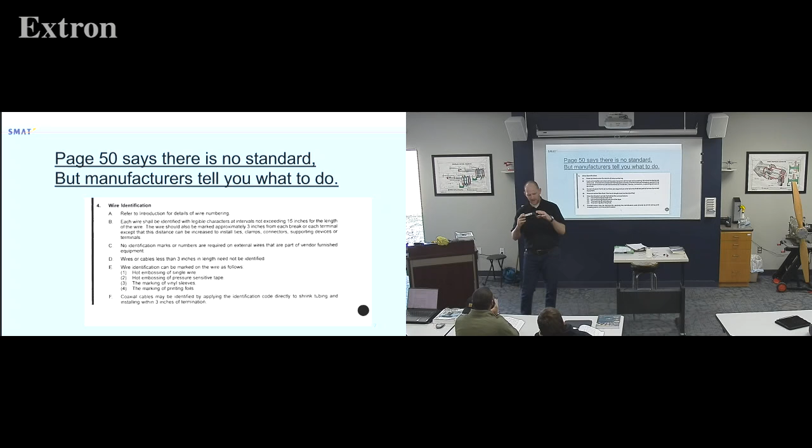One of them, if you pull a little bit out and look at it, it's actually heat shrink tube, very similar to this heat shrink tube. It's already nice and flat, which makes it easier to use your pen on, because this stuff's a bit of a hassle. I think if you look inside there, that's like 15 foot maybe. So you trim a little 3 inches off for small use. I don't have a printer that's going to work, but you take your pen, write on there, cut it off, put it on your wire, heat shrink the wire, and I do believe this one is from that. So we don't have to use the printer.

Now, if you right away touch the ink with your fingers, it's going to rub off. These ones I did with our regular heat shrink tube, and I did them with a magic marker. The magic marker ones are still on here.

You know, there's an old Chinese proverb that says, even the palest ink is better than the best memory.

The one I did with ink turned out better. So your wires in here, it takes a little bit of work. I didn't want to make you label every wire for your project because it would have been a nightmare and a ton of heat shrink too. When you start working on an aircraft, when you get out into the field, especially if it's a Cessna S model, if you want to follow the law, you will be labeling them.

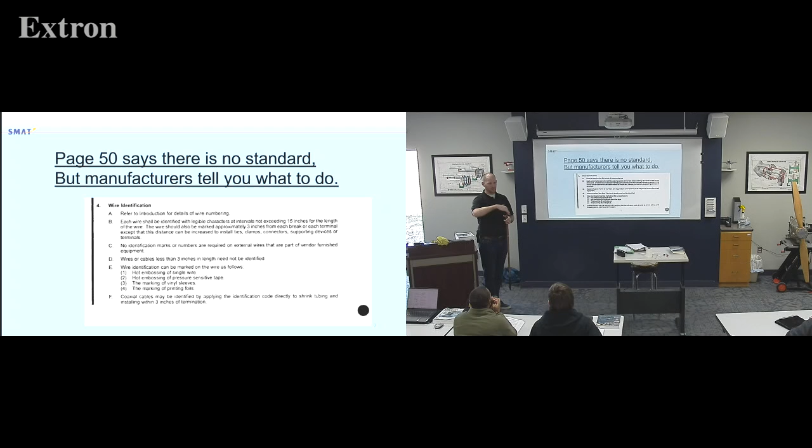A good airline shop will have a printer where the wire goes in it and it just prints right on the wire, pretty cool. We're not a good airline shop. So heat shrink's the best way to label your wire. I'm going to go with that. Questions on that? Good.

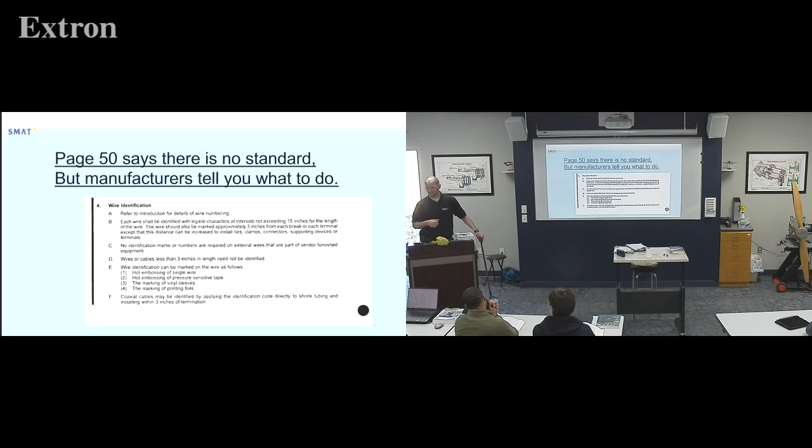Back to what we were saying. If you're working on an aircraft, if you're adding the STC, it probably is going to say in the STC what wire size, or it'll come with it. If you're not doing an STC, you're going to go find the wire that's in there. So this one goes from A plus to alternator. Well, that's going to be a big wire, isn't it?

So that is DPB12. Should I sound smart? That's Delta Papa Bravo 1, 2. Doesn't that make me sound smart? You're going to want that label not in the middle of the wire, but within 3 inches of this side, within 3 inches of the other side, and then every 15 inches-ish, depending on what airplane you're in. That's the number you put on the wire.

Make sense? Okay, let's say - what size is that wire? PB12, there's a GA here for gauge. I can't read it. There's a 5 there. 005.

5... let's pick a different wire. Let's go with this one. PB - that's a ground wire. Let me give it a small wire. PB26.

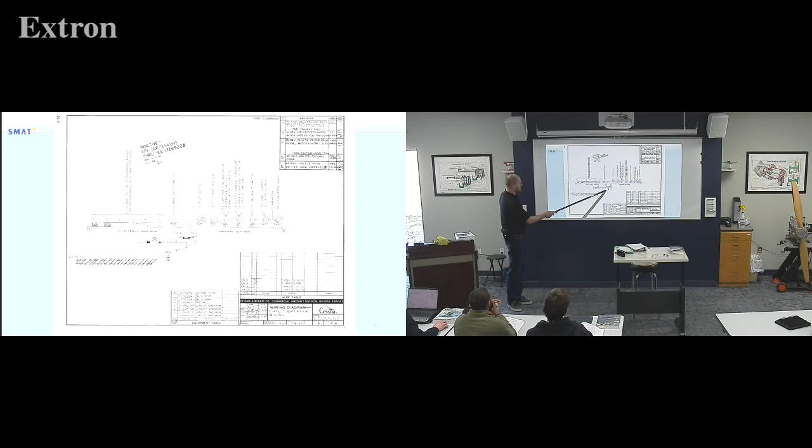Maybe it'll be on the next one. I think that was what I was trying to get across on this image, but it's not getting there. So I got a 14 gauge, 14 gauge, 18 gauge, 18 gauge, in the PA15, PA16, PA13. So it is listing these ones. But some of the wiring diagrams will say, unless otherwise stated, all wires are a certain gauge. So if you can't find the gauge for the wire you're on, look for a note like that.

All right, what do we got here? We got a landing light, MLC1. I don't know if I have that as an option. That's interesting. Oh, I got a 1. Does that give me 1 right here? Oh, that's just telling me the switch.

Huh, the right one, like 4 or 5 of it each. Oh, there you go, 14 gauge. Good eye. So 14's here, GA down here for gauge. Excellent, I went through this once. That one's 14 gauge, LC15. We got 15, hard to read. 14 gauge. I go through a fuselage, and now I'm heading out to the light, and all of a sudden...

I go to tan and gray. They start telling me colors. Oh, tan, so that wire is wire number 10. Go figure. So if you're going to make a label, tan it is. 14 gauge. So anyway, you get the idea.

Oh, there it is, black 2. Is there a black 2 wire? 16 gauge. That's weird. We fed the thing with 14 gauge, but then we come out with a 16 to ground. Why would we switch gauges? 16 gauge would be higher resistance. Oh yeah, smaller wire. It is a smaller gauge, so why would we do a smaller wire? Less volts? Wires hopefully don't see volts in that sense because there's a voltage drop across it. So we're on the right path with voltage drop across it.

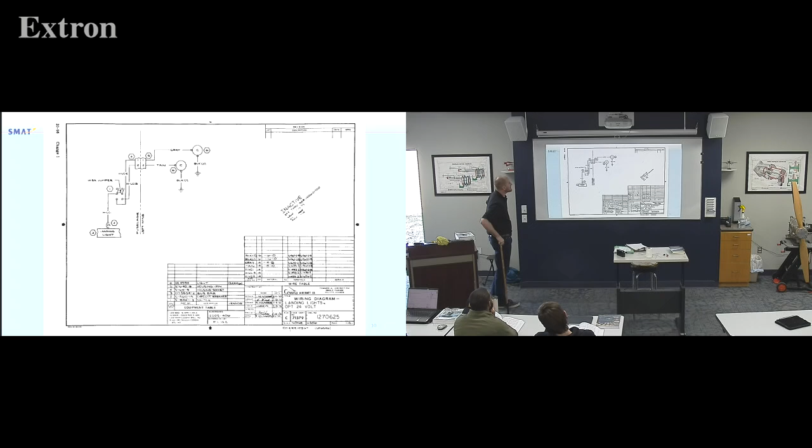So, all right, oh this was just kind of a fun one. Does this switch look kind of... oh, never mind, it's not as fun as I thought. Does it look strange to you? There's a little line that connects the two. So I know if you turn one on, the other one turns on. I guess they each go to their own light. So interesting, I flick one switch on, it turns both lights on. So what would we call that?

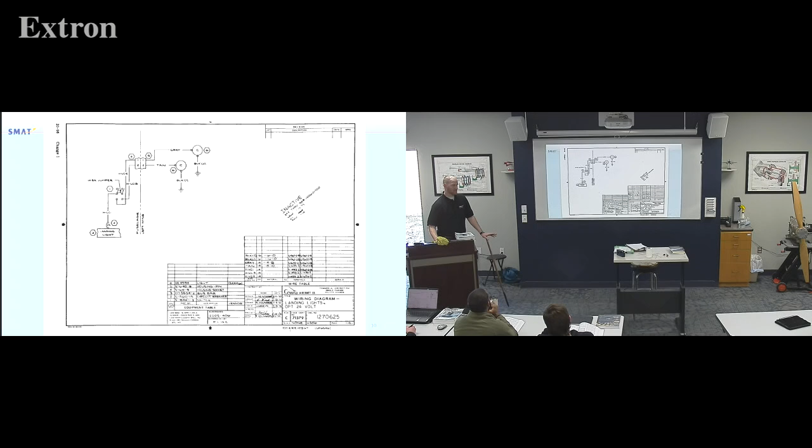Double pole, single throw, there we go. Double pole, single throw. Off doesn't count as a throw. So off is, we don't count that. So you can have it in the on position or the one we don't count. So double pole, single throw. Oh, that wasn't too bad. We're moving along.

We're going to go over these things. I'm supposed to grab my book and go to 455. If you want to go there with me. 455.

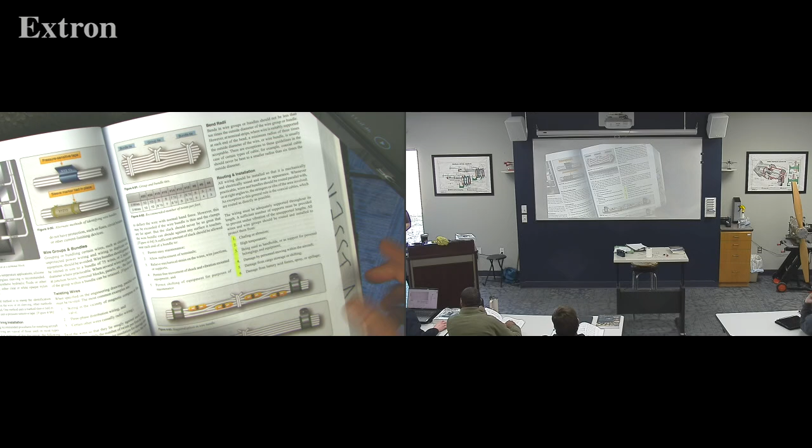Insulation. Really, you could just read this, but I'm getting paid to teach you, so we gotta go through it. We want to protect our wires from chafing or abrasion. What does chafing mean? Rubbing down. What's the difference between chafing and abrasion then? Chafing is also rubbing, abrasion's a cut. Okay, I'll go with that. I didn't know, so I was asking you guys. High temperature, obviously, we covered yesterday, we'll talk a little bit more today about some of our temperatures the wires are allowed to be in.

There's different ratings on the shields, the insulation. Number 3, being used as handholds or support for personal belongings and equipment. It's funny that they have to put that in there. But basically they're saying, don't run a wire where there's people, because people are dumb. They'll grab onto it, or hang their coat on it. That's essentially what they're saying.

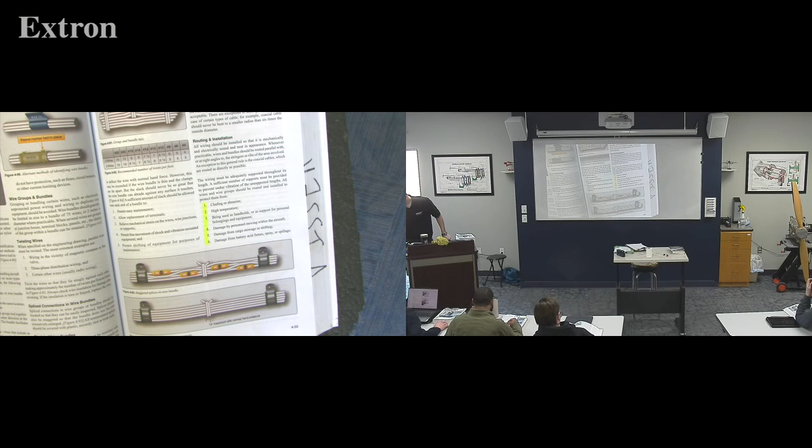Damage by personnel moving within the aircraft, back to basically the same reason. Damage from cargo stowage or shifting. Damage from battery acid, fumes, spray, or spillage.

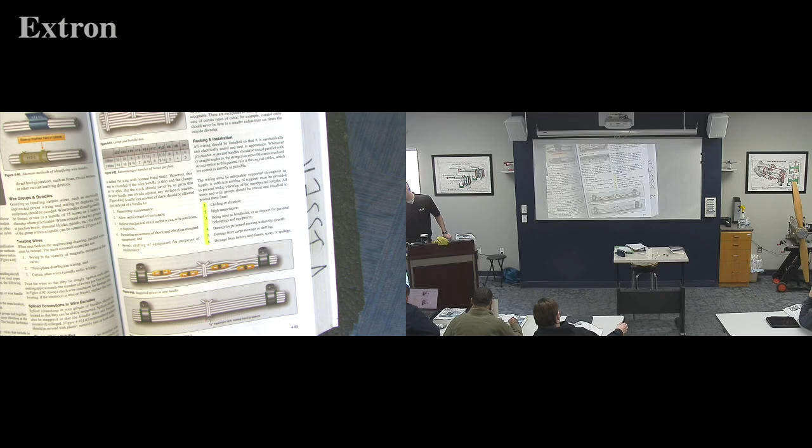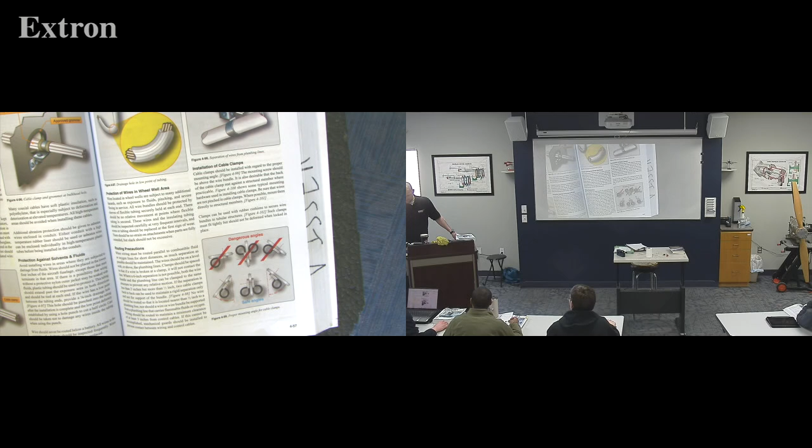That one, each manufacturer's gonna be a little bit more specific. Your book talks a little bit about it, but we don't want to put our batteries above a wire. Maybe I should phrase it the other way around - we don't want to put our wires underneath the battery. You can read about that, it talks about it, but that's pretty much what we covered. We don't want our battery acid to get on it, and they're being careful with the fumes as well.

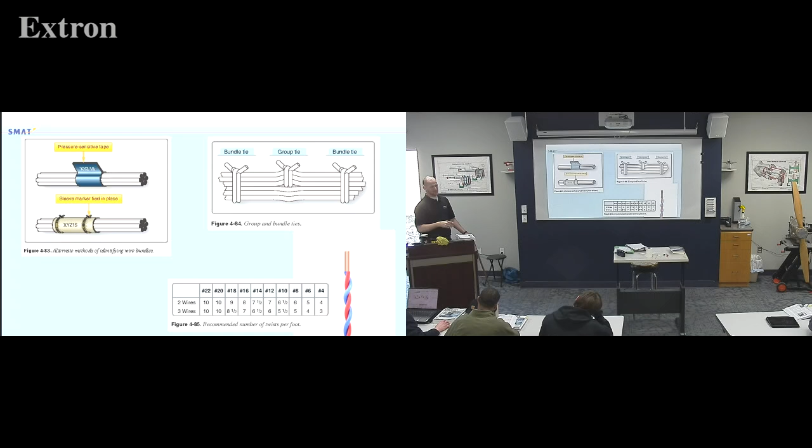3-phase power distribution - if you start working on like airliners, it'll be more of a thing. They'll twist them up so that the frequency doesn't radiate into all your radios and stuff. Supposedly twist them up, basically it breaks up the signal. So anyway, twisted pairs, kind of weird.

Okay, splices. They absolutely want you to know that if you put splices in, they should be staggered. They also want you to know you shouldn't put splices in. So how do we teach you both things without sounding like we don't know what we're talking about? I don't know if you can. So if you put splices in, stagger them. We wouldn't want to have a splice, splice, splice, splice, splice, and have this big thing. They want you to know that. You'll get it on a written, absolutely guaranteed. What you might not get is that they really don't want you to put splices in.

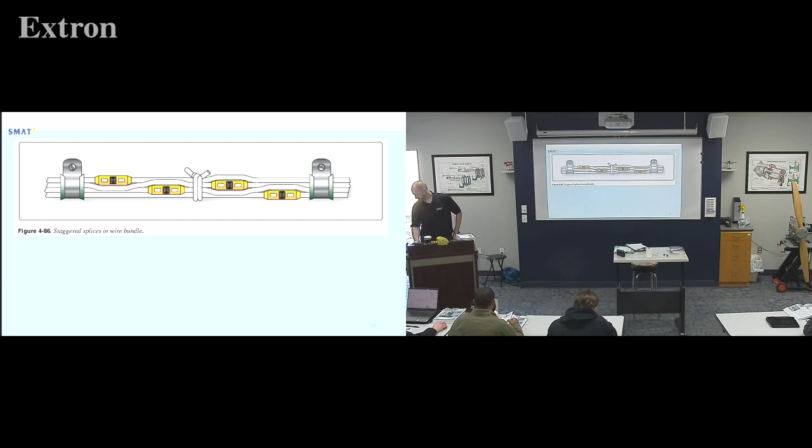Slack - you slackers. Half-inch maximum with normal hand pressures. Is this people walking through the cabin hand pressure? No, we're not letting those guys get anywhere near our wires. This is you guys when you put it in. So what they're not saying is that when you run your wires, you should see a half-inch droop in between all the supports. That's not what they're saying. What they're saying is it should pretty much be tight, not guitar string taut, but pretty much tight. And if you go like this, yeah, you should get about a half inch down.

You might think, you're talking about this a lot, why do I care so much? I was just flying a tailwheel the other day, and we're rumbling down the grass, and I'm looking at the back of the airplane, and the whole thing's going all over the place. I'm like, I am glad I'm not doing the 100-hour inspection looking for cracks on this. You can hear the cables slapping, and the wires bouncing all over the place in the back of the aircraft. So we want them tight, but not so loose that when we're hitting all those bumps, the thing's bouncing around and slapping stuff and possibly grating.

Chafing. We don't want it chafing, yeah. I didn't used to know what chafing was until I got a little older.

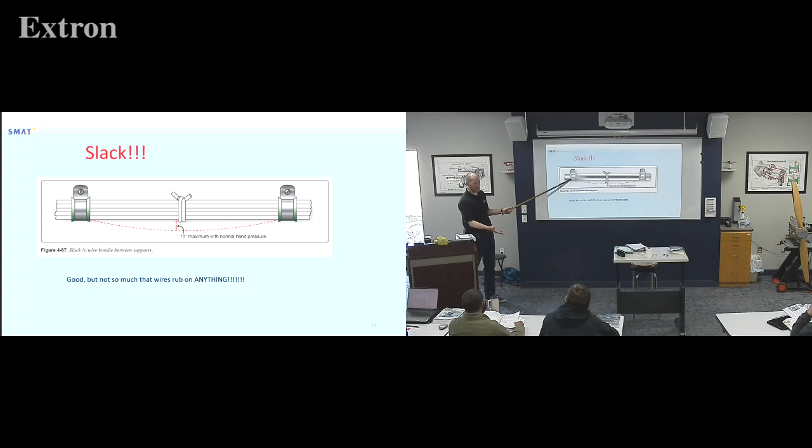We're just trying to make it look neat, okay? So, zip tie here, I'm fine with that - I don't have a problem with that. Zip tie tying it to the structure so our wires don't fall down and hit something, not fine with that. So that's kind of how the FAA is looking at zip ties.

Alright, bend radius we covered in airframe - 10 times bundle diameter. Yeah, okay, we can go down to 3x in certain instances if it's supported on both sides right across from the terminal. But if we're going to talk about that and open that can of worms, you can't go that small with coax. Coax is 10x as well, but they'll give you down to 6x on the coax cable, right?

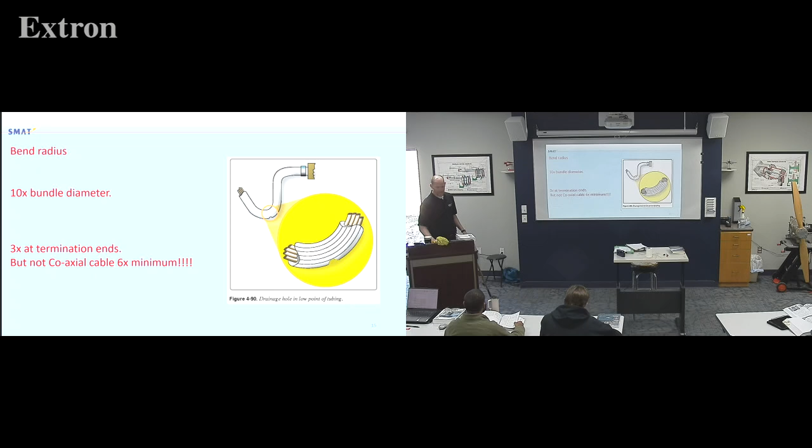When you replace the wires on the aircraft, me and Bean don't want to hear 'it was like that when I found it.' That doesn't fly in the aviation world. Now, if you're replacing a wire and all the other ones are garbage, you could say they were like that, but even that's not good practice. So maybe clean up a couple of them, leave things better than you found it. But routing should be neat and tidy. They like to say parallel or perpendicular to stringers and supports. The idea is you're running it so it looks nice. When I used to be in heating and cooling, you'd be in the corner of the basement over here with the gas meter, and the furnace was in the corner of the basement over there.

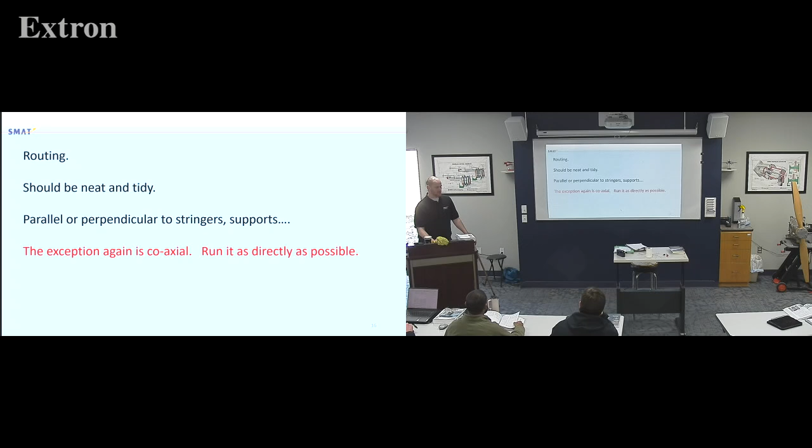The exception is coax. It's not that this is more important than that - if anything, I should have put it the other way around, but I wanted to make sure you heard the exception. The exception is coax cable. We don't run that in a bunch of bends. We want that as short as possible, and in reality, we don't want it by other wires. So we're like, well, just make that one look ugly. Did I say that out loud? That's what we do with coax cable.

All right, red wire - this is grandpa. Anybody see anything wrong with the red wire? Ooh, that one's not chafing, is it? That would be abrasion. That is definitely abrasion.

So this was from one of you guys when you were doing instrument class. I went up under there to check on the instruments, and I moved the control yoke, and the control yoke swung back and basically grinds the wire right into the radio. And I'm like, ooh, that's probably not good, because that's a pretty good size amp draw wire. It's red, which not always, but probably hot - it's probably a hot wire. And it's going to grind right into the bottom of the radio. So I can just picture it, right?

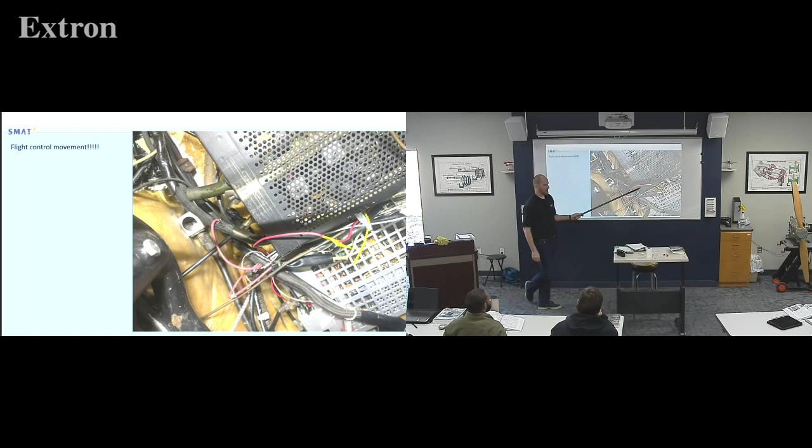You're coming in for a beautiful landing, you're flaring, and it shorts out, and we got a fire in the cockpit. Wouldn't it be good, especially on the wires? That's why I gave you 3 days and 6 hours of lab time to replace a wire in an aircraft that hopefully goes through a firewall that you get approved, so you realize this might not be as easy as I thought.

We have a handful of these in the Molex connector thing, I think, right? If the wire you're replacing goes through a bundle that's all tied up, you don't have to cut them all. You can just stick that through and run it. So, a little reminder on that.

But we do want the wire that you replace secured properly according to section O for Oscar, not using tape, cable ties, or lacing as primary support. It gets a little funny when you're behind a control panel, I will admit. That one's a little weird. I don't have a good answer for that.

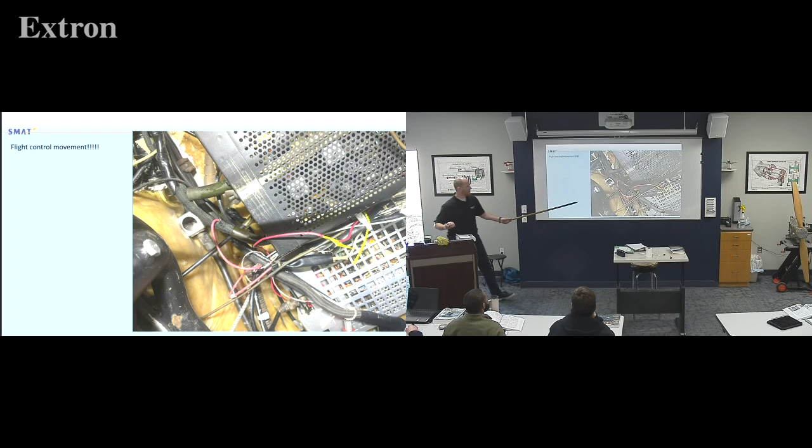Also, did you notice this? That doesn't look factory. The radio wasn't found very secure. I'm not saying that was you guys, I'm just saying at some point in the last 20 years, there's been a lot of SMAT students in there.

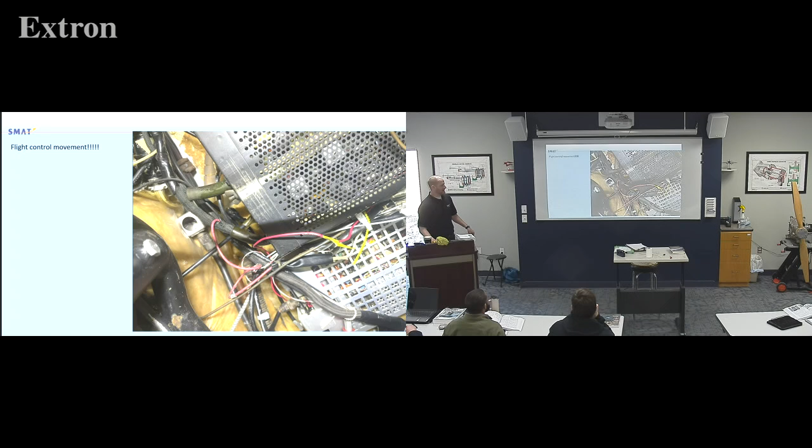So yeah, secure some wires. Chafing, abrasion. That was Dean's book. He even thought it was important.

Firewall, these little grommet things. It is a firewall, so we're trying to keep fire from going from one side to the other. But there's really 2 functions on those.

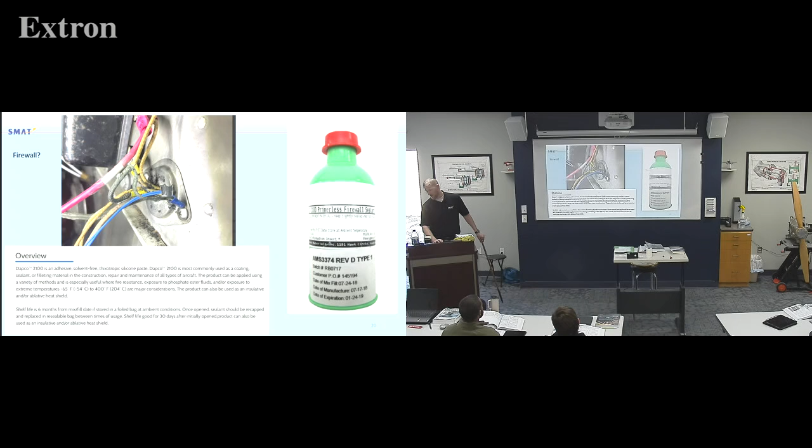That was in 2007, Cessna listed that. So we've had a few years since then, but they officially said, well, go ahead and use that stuff.

So some of our areas are going to call for our wires to be protected with high temperature sleeves. Is that so the wire heating up doesn't damage anything? No, the other way around. Maybe we're running it on top of an engine or something like that, and we don't want to damage the wire with the heat. We're trying to keep heat from coming in, but we make heat with our wires too, so we got to be a little bit careful with this stuff. You're not going to see it run for real long lengths typically, because the heat would get stuck in our wire and it could overheat or get hot. But that's what they're talking about with high temperature sleeves. A lot of times you'll see it if wires are near exhaust pipes, to keep the heat from the exhaust pipe from getting on the wire.

Copper's pretty good at conducting heat. How much of a problem is it actually with the wire though? Because our wires where these are at are usually only a foot or two long, it's like, yeah, we're probably fine. That's why you probably don't see it that much.

Maybe another way to phrase that: anytime we're doing something like that in that area, hopefully you're checking the manual. It'll probably tell you where the wire goes, and/or they're going to give you a wire size or wire number. You're not going to be picking wire size anyway, but I'm throwing that out there so you're aware of it, in case there's a prep work question or DME starts asking questions about high temperature sleeves. You're protecting the wire, but wires do give off a little bit of heat. We're probably not going to see big bundles of wire running through the aircraft - that's kind of the point I'm making.

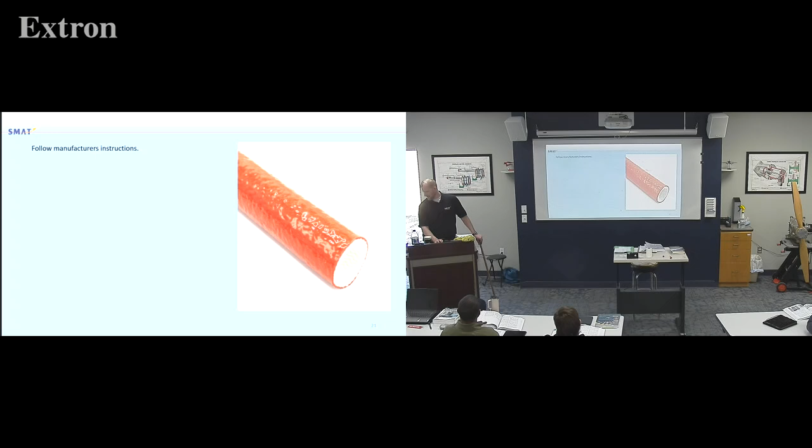Does that go over the wire itself? Yep, it's not like it's a special type of wire - it goes over the wire. It's kind of like a heat conduit.

What's interesting on these is anytime you have a conduit - think metal - they want somewhere for the water to come out of it. So any spot where water could pool, we're going to put a hole in it so the water can drip out.

Couple other things: never under the battery. I thought this one was fun - avoid the lowest 4 inches. I was like, what's bottom mean? Fuselage, protect from fluids - that must be like jets. I actually put a tape measure in the 206 because I'm like, that's weird. And I got some wires down pretty close to 4 inches, but there's only about 3 inches down there.

I also see stains from where water in our float plane had gotten up, and dirt and crap, so just be aware of that. We don't want wires run in the bottom where water could pool. Where's the drain hole?

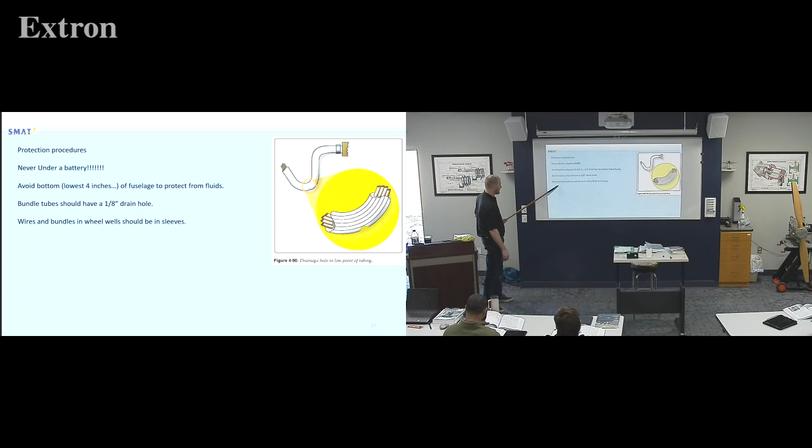And sleeves - we talked about that. Wires go above fuel lines, not below.

Somebody can get a job with the FAA just writing manuals. So if that's a separation and not a support, does that mean you still have to have proper support, the correct spacing of support? That's a great question - like if it's between, how many inches? I don't know, I don't know if I've ever seen one do that, just because the manufacturers are usually pretty good about not running them by each other in the first place. But I think the point they're trying to get across is we don't want the wires rubbing through our fuel lines or oxygen lines. So by all means, we won't say you're supporting it - just put a separation on it.

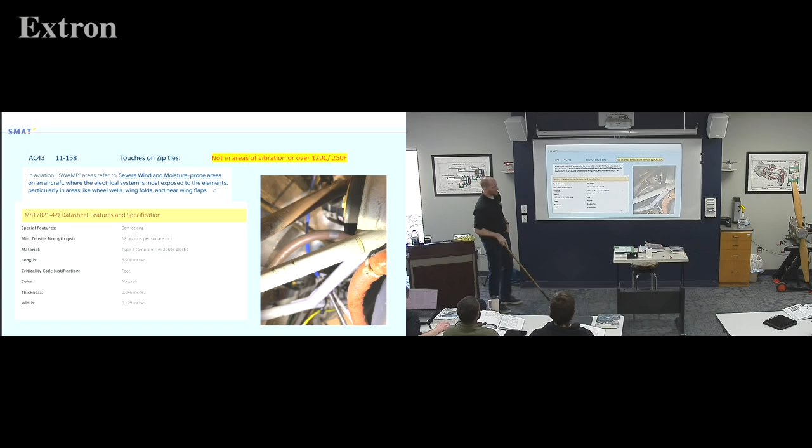No zip ties. It's AC 43.13-1B, section 11, 58. I got a lot of highlighting when I get there in this section.

Close, close, oh too far. Is it not a 58? 1151. Why didn't you guys correct me earlier? There is no 11-58, it's 11158.

Under lacing and ties it says: ties, lacing, and straps are used to secure wire groups or bundles to provide ease of maintenance, inspection, and installation. Braided lacing tape per mil spec is suitable for lacing and tying wires. In lieu of applying ties, if you're lazy and don't like them, straps meeting specification MS 17821 or MS 17822 may be used in areas where the temperature does not exceed 120 Celsius, which is 250 degrees Fahrenheit - not that hot.

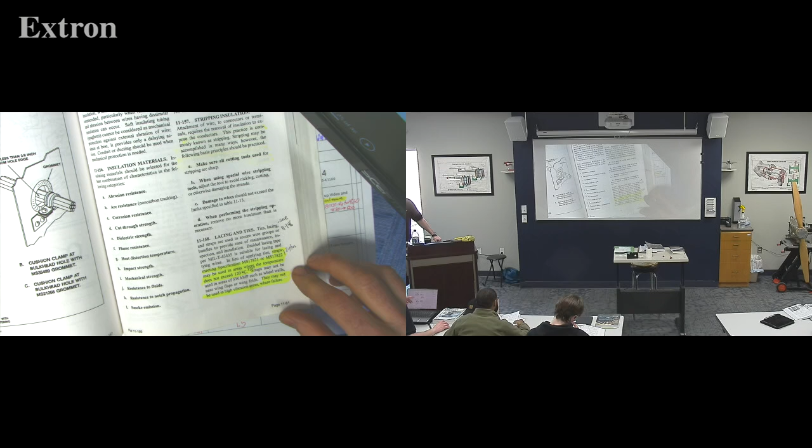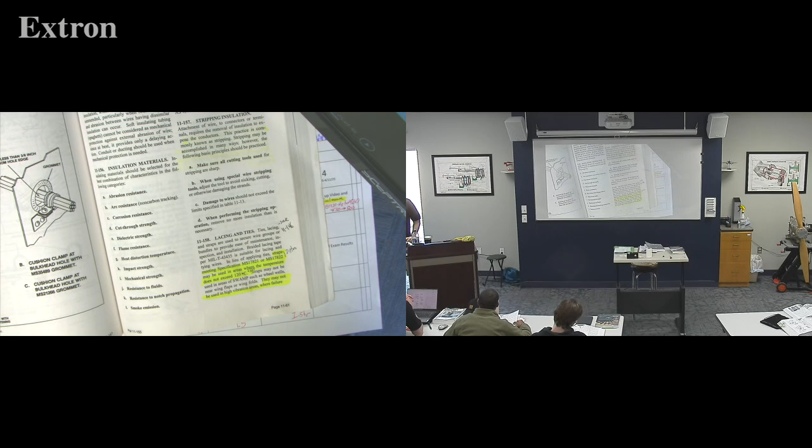A tie is lacing, you tie it. Well then what's the difference between ties and lacing? Lacing is when you use the tie and then go down and do another one, it's a run - lacing is a long. A tie is same material, different - a tie is one knot. Lacing is when you - I lace my shoes if I go through a bunch of eyelets, I tie a knot. That's a bad example.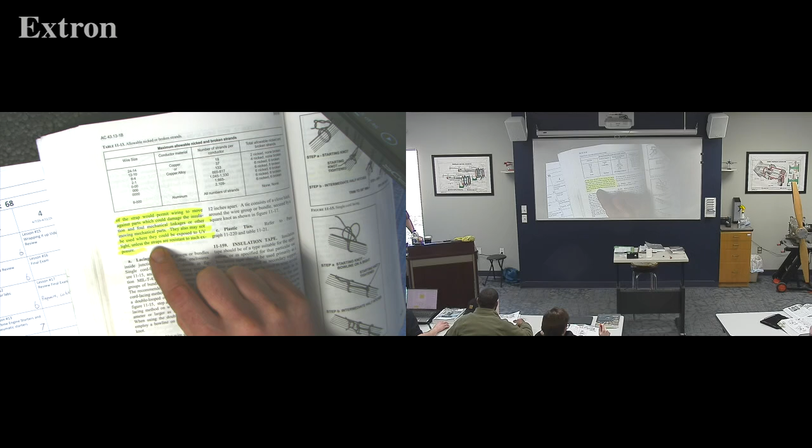All right, here's the big part I want to get to: the strap. You gotta start over here. They may not be used in high vibration areas where failure of the strap would permit wiring to move against parts, which could damage the insulation and foul mechanical linkages or other moving mechanical parts. They also may not be used where they could be exposed to UV light unless the straps are resistant to such exposure.

Some cable ties, the plastic black ones, are UV resistant. They can be used out in the sunlight if they're allowed to be out there. There's helicopter guys that use them on the rotors, I think, because it's easier to do than safety wire. I think the Blackhawks have a couple specific areas that use cable ties, because they're cutting them off constantly to keep the sand out of stuff.

So all that goes back to, they're not supposed to be primary support. We read that in part O, right? So it's to make stuff look neat, but if that cable tie were to fail, it shouldn't let the wire fall down and hit anything else. The primary support keeps it up nice, and the cable tie is just making it look neat and tidy.

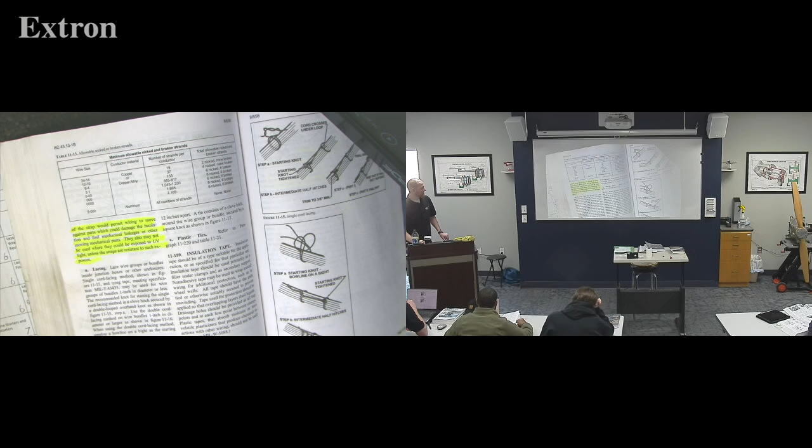For our clearances going through a hole, figure 11-14 says minimum of 3/8. That's interesting. Where'd we get the quarter inch from the textbook? Oh, page 11-6, yeah, right on that page. It shows it, you got it right up on your screen. It's the illustration. I was looking for where we got the quarter from.

Is the quarter-inch one if it's less than 3/8? Oh, I wonder if they considered a quarter as less, and since we're only going in eighths, if you get down to a quarter you need to grommet it. We're splitting hairs, but good question though.

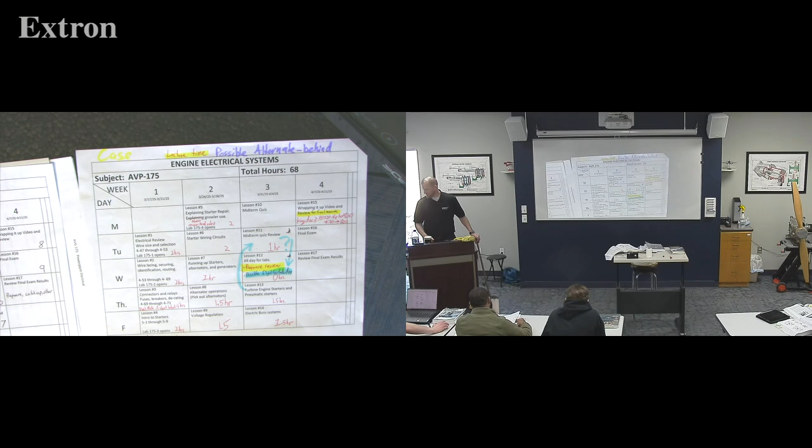Your textbook, I took that image from, is the one that had the quarter. Did you find the textbook? I didn't know that. That one does say 3/8 though. Now you got me, we'll check on break. Pretty sure I grabbed the one image out of the textbook. So the question is, where did the textbook get the info from? Good question.

All right. Oops, sorry.

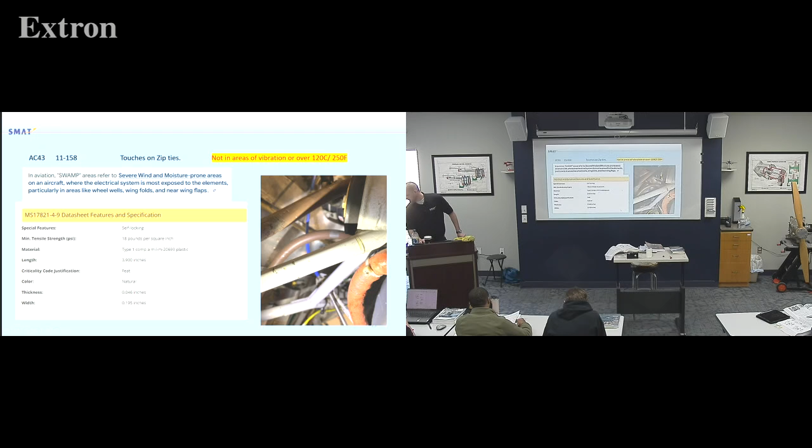One thing, I know you guys didn't get hammered with this as much as my class did: motor mounts. Zip ties can be a pretty big no-no on those. I believe the idea is if you have an actual clamp, especially with rubber on it, it's going to stay pretty tight and not allow any dirt underneath. Zip ties on the inside have all those saw teeth, right, which is a great spot to catch dirt and whatnot. It can get under there.

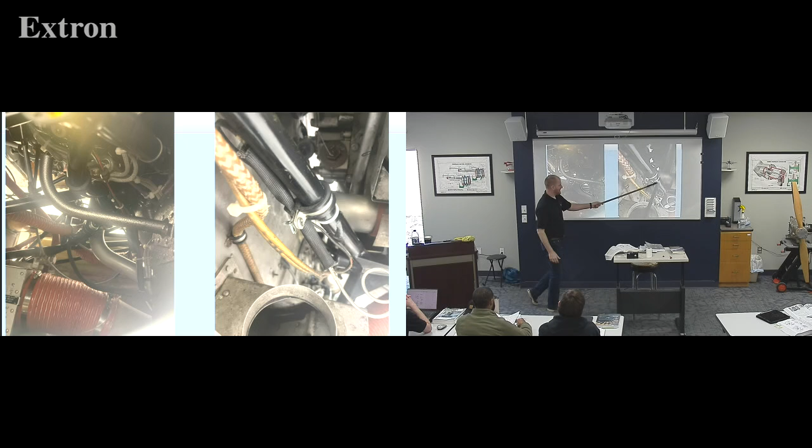Especially in a high vibration environment, what can happen under that zip tie is you get a little dirt under there. It's actually not the zip tie that wears through the motor mount, but the dirt that gets under the zip tie and sits there and vibrates, and it can actually wear into your motor mount. So motor mounts are one of those things - you don't want to replace your engine mounts because you zip tied it. It's best to use a clamp with rubber; apparently those don't have the issue of getting dirt under them and wearing through, because you're clamping a little tighter.

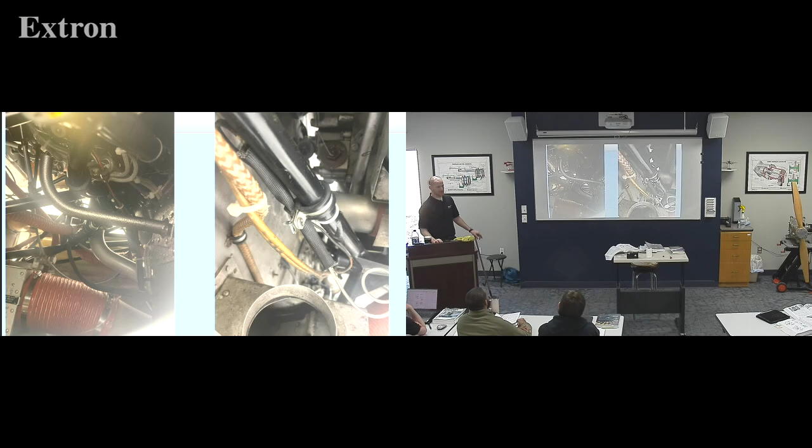When we were in class, they actually had some motor mounts they displayed and showed where the zip ties had worn through, and they had to change the motor mount out because some guy was using zip ties. So anyway, it's hard to see in here.

Cable ties securing stuff together, we're like, yeah okay, best is this, right - primary support. That's just to try to make stuff look neat. But these were some actual aircraft, I just took some pictures to go, hey, what's out there. This one, it's hard to see why I took the picture.

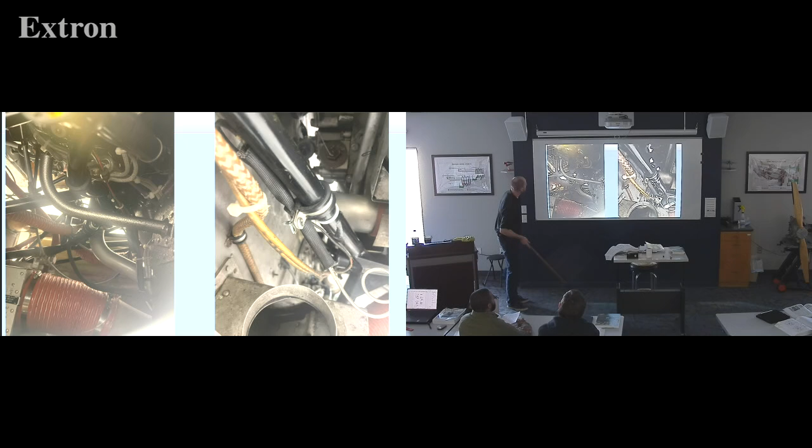Cable tie, I think it's up here. The picture didn't show up well. You got like a motor mount with a clamp, and then a bolt, and then another clamp to the wire - that's the best way to do it. I'm sorry that didn't come through, but I'll draw it. There's your clamp around the motor mount, and then they have connected to it another clamp with the wire running through it. That's the best way to secure a wire in the vicinity of a motor mount.

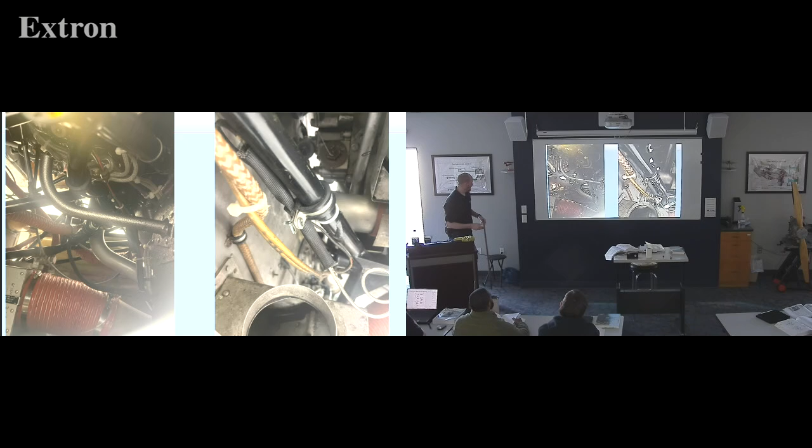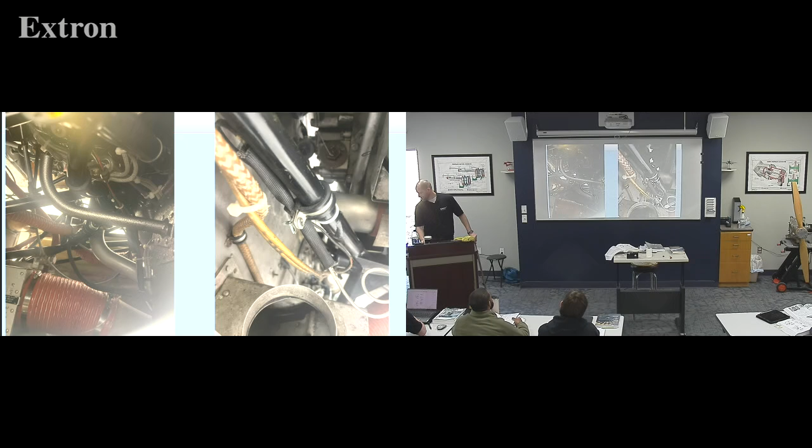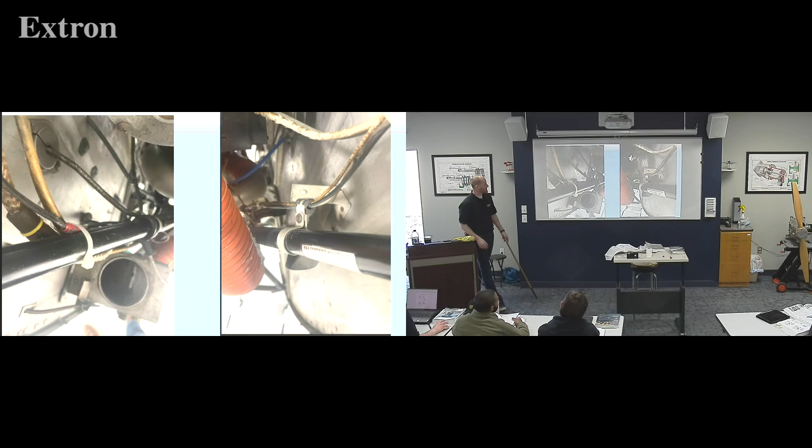Because you pretty much aren't going to get away with engine compartment zip ties for primary support. If I see it, I'll cut the zip tie and then we'll see what the wire rubs on. So like this - yep, that wouldn't fly. That's what we want. Something to that effect.

These are expensive zip ties, pretty cool. You could get away with putting those on engine mounts, especially the experimental people, which we don't talk much about in here. But they like those, they'll buy them because they like to secure stuff to the motor mounts, apparently because they don't know how to use real clamps. And they're fast and easy.

So it's a zip tie with a little bit of rubber on there, and the rubber is cushion enough that I guess you can't get dirt under it. It doesn't move around. So it's pretty expensive, but you can also undo them - you just put your thumb in there and undo it. There's a couple brands that make them that are actually aviation grade or rated. So if you're the kind of person doing a lot of wiring and you just gotta use cable ties, buy the good ones and charge the customer for them.

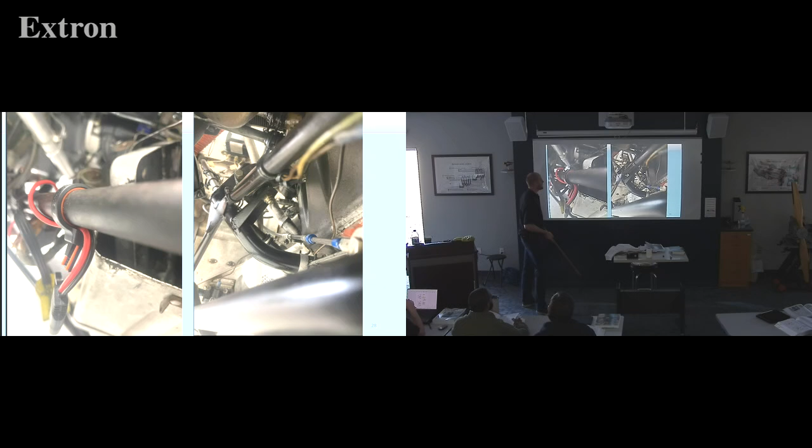Over here, I know what I'm supposed to be looking for, it's hard to see it. So they used a cable tie. You don't see them anymore because they're hard to work with, but they used to make a plastic like lacing.

And you'd basically be lacing with plastic. It's really interesting - that's actually where the name cable tie originally came from, it was just a plastic cable that you would tie, and then we upgraded to zip ties, which is why I always say zip tie instead of cable tie, which is what the book says. That word cable tie comes back from where you used to tie it, there's a plastic cable. I like zip because zip is how it sounds. Zip. So you may run across true cable ties.

I'm going to draw a couple images. Let's say we have a motor mount or anything and it's round like that, and we got a wire that we want to secure to it out here. We really don't want to cable tie that right to it because we could get some abrasion, we could ruin the insulation, we don't want it bouncing around. So we could go with option A, put a clamp around here. It's going to be a funny shaped clamp, isn't it? We'll go all the way over, because that's how the clamp would look, and then another clamp, and we could put the wire way out there. That would work. That's a really good way to do it.

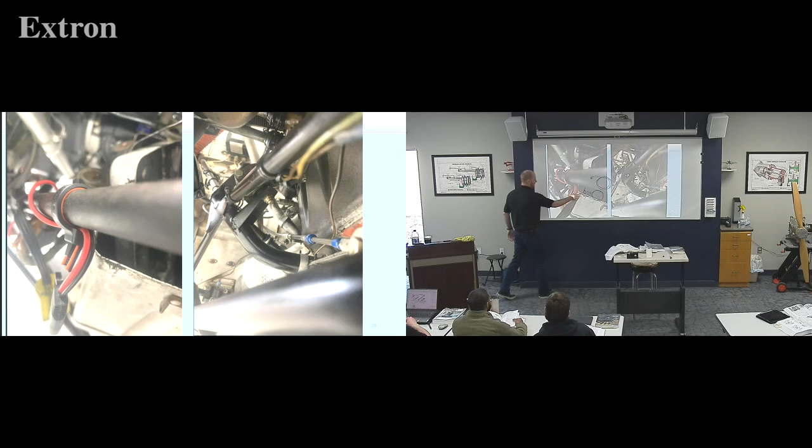When you cinch that baby down, what it'll do is it'll hold the wire out away from whatever object that is. That's a really neat way to secure wires, whether you want them spaced apart from each other, or maybe you got a wire that needs a space - what was our distance from a fuel line? Half inch. So you just need a half-inch long rubber tube, and you can use this method. It'll hold it a half-inch out. It keeps everything separated, and it's just a better way to run a wire instead of tying it directly to a round structure or piece of member.

So I had a couple pictures, some of the other ones might show up. The cable tie one had a similar setup in that you had a round piece and a wire - they came around with it, went around the wire, and then wrapped it around and tied a knot there. Kind of weird, but it just keeps stuff separated and it can make it look neat and tidy. Easier to do with a zip tie and a little piece of rubber.

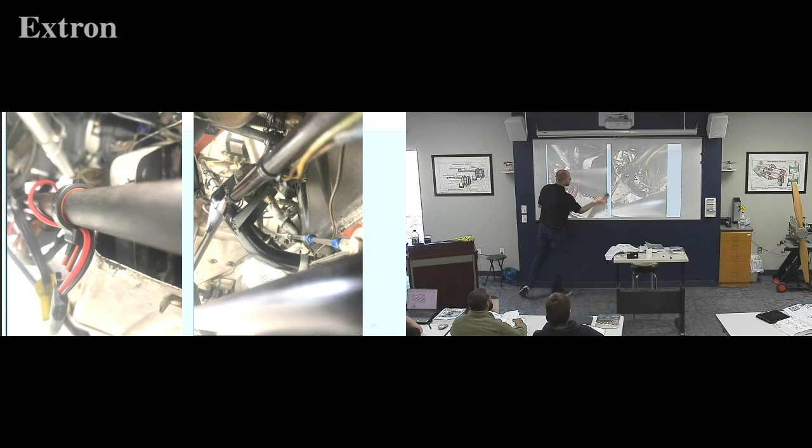There we go, and there's another image of it that shows it really well. Pretty cool, huh? That way you're not cable tying it right to something. Now, I'm showing you a ton of pictures that got cable ties on engine mounts because it's SMAT and that's where my camera is.

If I'm worried about dirt getting under my zip tie and wearing through my motor mount, what are some creative solutions we could do? Use a clamp, that's the official way. Rubber lining tape, or instead of buying zip ties, use a little bit of electrical tape. Then when my cable tie goes around, if dirt gets under there, I'm not so worried about it. Maybe the dirt runs into the electrical tape, but it's not as big a deal. So if you must connect to an engine mount, put a little bit of rubber or electrical tape under there, just to keep it from clamping directly.

Wouldn't the electrical tape trap moisture against it though? It shouldn't be moisture in that situation, since it's gonna be dry when you put it on. But electrical tape doesn't hold up very well with water, so if it gets exposed to water, you can trap it underneath. So clamps are still the best option. But a clamp's gonna do the same thing in that best case scenario.

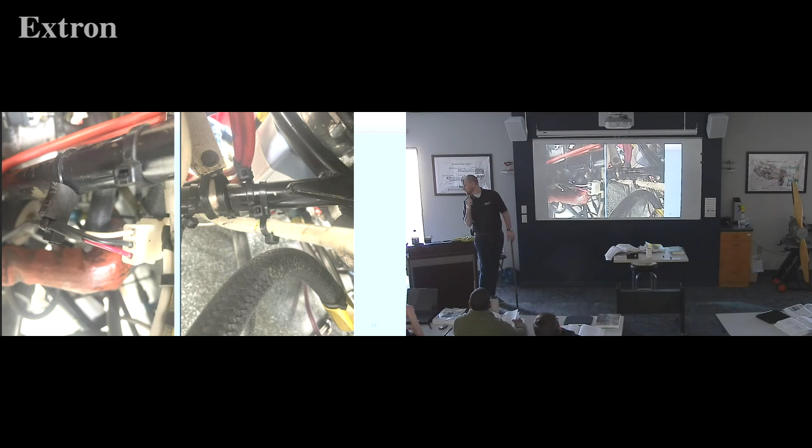I think I've got some pictures coming up. Best case scenario, you stay away from the engine mount entirely. You put a clamp on a bolt on the head, or on the baffling. You haven't had baffling class yet, and most of these engines don't have baffling, so it's hard to explain. But on a real engine, you'll have all kinds of aluminum baffling so the airflow goes through the engine correctly. Normally running wires is much easier than here, because there's baffling and bolts holding it on, and you just mount your clamps to that. Here it gets a little bit funny.

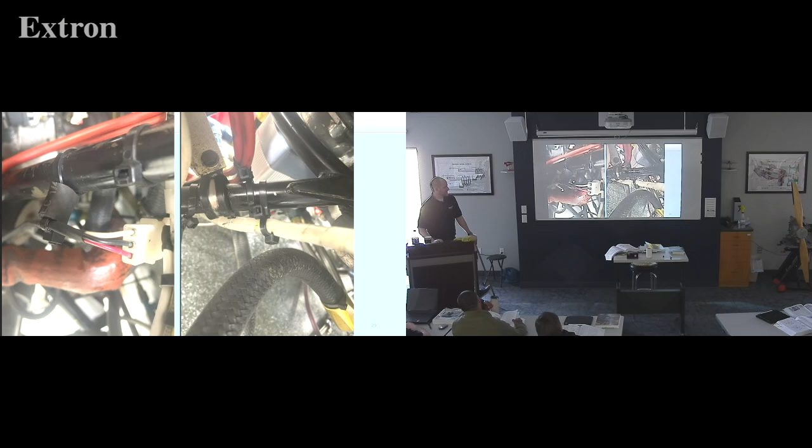So here's one with a tube. Here's one with a double zip tie, but it holds it away from the pipe. That's much, much better than if they would have just clamped it right to that pipe—you're not gonna get near the chance of having an abrasion that way. This is actually, you can't quite see it, but you can see the knot, that's an actual cable tie.

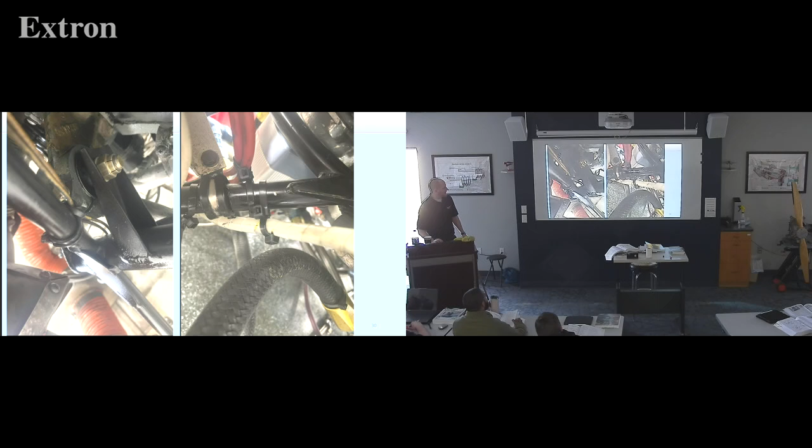Alright, back to this, here's a piece of baffling on the front of the aircraft. This is the best way: you use a clamp, putting it under a screw where the baffling is. I don't necessarily like them under valve covers, but you'll see a lot of them under those valve cover bolts just because they're convenient places.

One of those valves with a bolt, like one of the studs that has a nut on it, that'd be handy. You should invent that, make a lot of money. It's already a thing. It's already a thing? I like that.

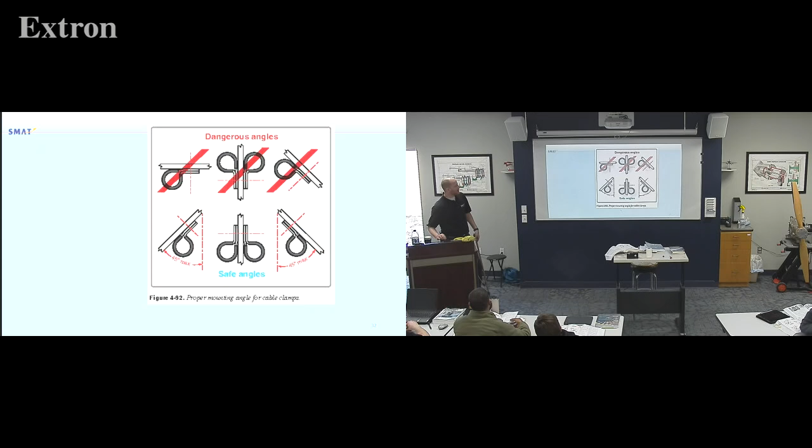Alright, remember that image where we were separating the electrical wires from the fuel line, and I said it shouldn't be that way? It's because they had it set up this way. We talked about this in airframe—if it's here, and you've got a little wire in here, a bunch of them, it can fall down and get pinched in between those two. So we don't want to mount them so the wire can get pinched in between. That's why those two are no-nos, and that's why that one's a no-no too.

This one's a little bit weird, it's hard to tell why it's a no-no. The closest I can figure is they'd rather have it up on top. Isn't it because they see the weight of the wires wanting to pull the bolt clamp open? Exactly. Picture the bolt right here—if I pulled really hard on this with my wire, it's going to try to pull my bolt and everything out. That's why I say that one's a little bit weird. They would have preferred it sit on top, so the weight of the wire just pushes it into the support. But we're splitting hairs on that one—I just wanted to talk about it because it's interesting.

Would that spot be just as likely to get your wires pinched? Well, it's on top, not the bottom—when you put it flat on top, what they're worried about is gravity working overtime with the vibrations. On these ones, the wire will work itself out of getting pinched with gravity and vibration. On these ones, they'll work their way into getting pinched with gravity and vibration.

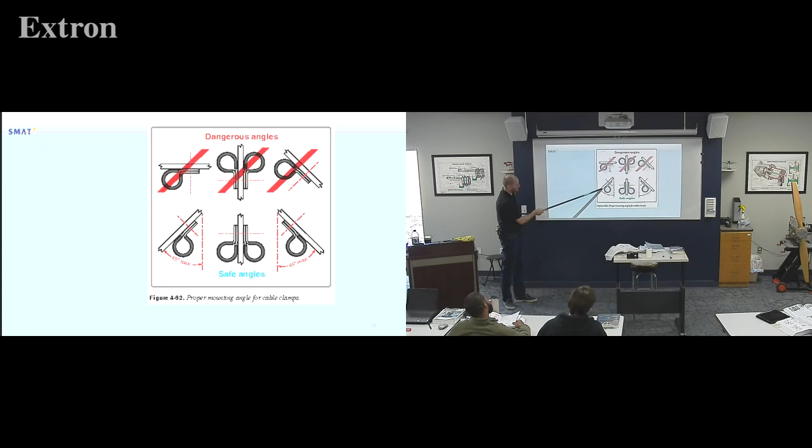So it's interesting, the reason they give you a 45 degree max is exactly what David said—they're worried about the clamp pulling off. I'm like, really? But hey, I guess if you're doing 9 Gs, maybe those wires are heavy. That's what they're going for with that.

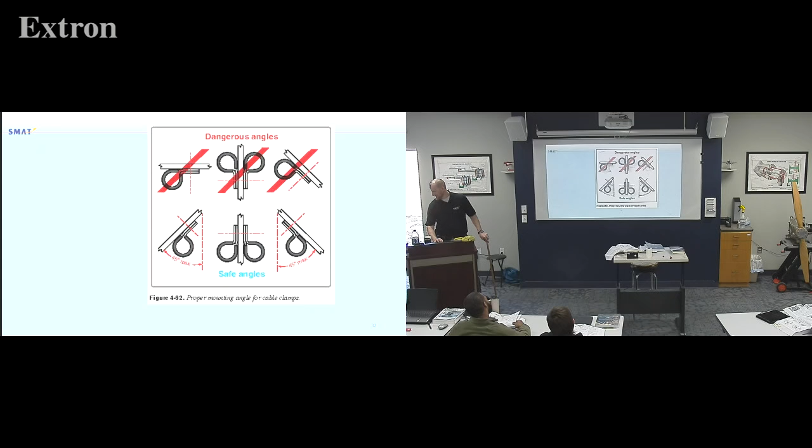Alright, let me pause this a sec. I gotta see. Nah, we'll keep going, we'll rip through it.

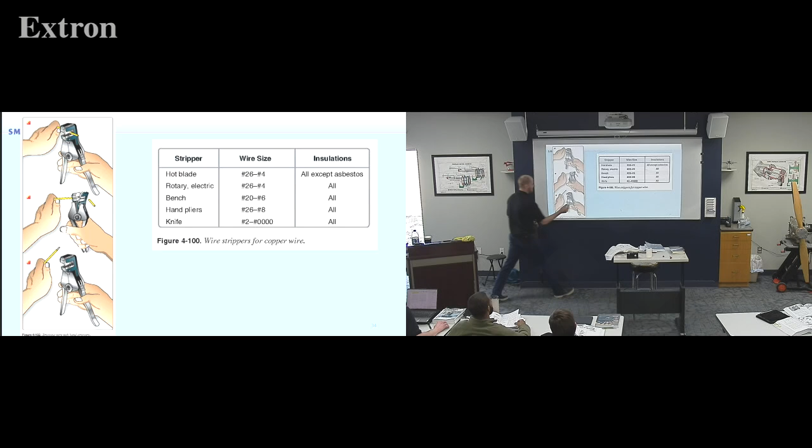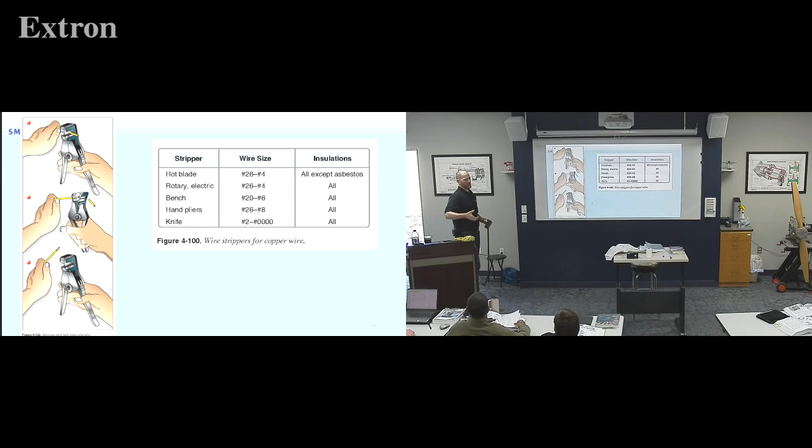What I thought was interesting on this one was, if you got really big wire, number 2 or larger, they say to cut the insulation off with a knife. You get that big, you'll probably nick wires, it gets hard to get the insulation off, so you use a knife carefully. Usually what you do is make a cut so it kind of opens up, then carefully cut around the outside. So large wires, that's pretty common even in the electrician world, don't try to strip them with wire strippers. Basically, you're using so much force cutting through the insulation, you'll never realize you're nicking the copper as you go.

Speaking of nicked copper, that is bad, that is not allowed. We gotta be really careful that we don't nick it. In your book, it'll talk about how many wires can be broken off, they actually give you a limit. We talked about it in airframe, I don't remember the number right now, but you can go back to that. Basically, if you break one wire, you better go double check: am I allowed to have a broken wire? I don't remember if I'm allowed to have a broken wire. So go find it in the airframe manual, or AC-43, or just cut it again and make sure you don't have a nicked wire.

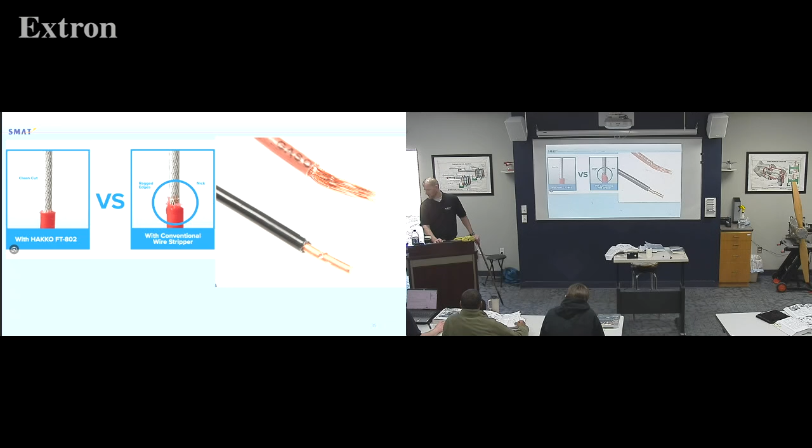Splices, it's an interesting area. Dean loves soldering, because the idea is if you solder it, they can't pull apart. That's one camp, makes logical sense. Case doesn't like soldering, because I've found too many connections broken, not necessarily airframe, because when you solder them you get the wire hot, and hot means brittle, and it's susceptible to breaking. The idea is on a solderless crimp connection, the stress of vibrations is supposedly spread out over a longer distance, whereas when you solder it, pretty much that first point coming out of the solder, where it was hot, is where it'll break off.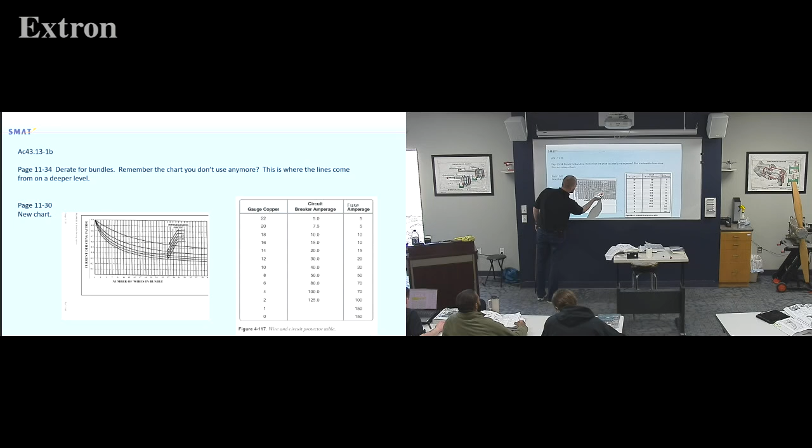Alright, page 1134 talks about derating for bundles. I've done wire sizing a bunch with you already. The old chart would do the bundle, not bundle, the new chart does not. If you really get into reading it, technically wire sizing you're just going to go with the manual, but technically it's going to use the chart, use the derate bundle, check for circuit breakers, circuit breaker size. So this is pulled right out of AC-43, and the idea behind it is if I have 10 wires in a bundle, and if I'm loaded at 100%, that means all of my wires are using power all of the time. So I got 10 wires that are all using power all the time.

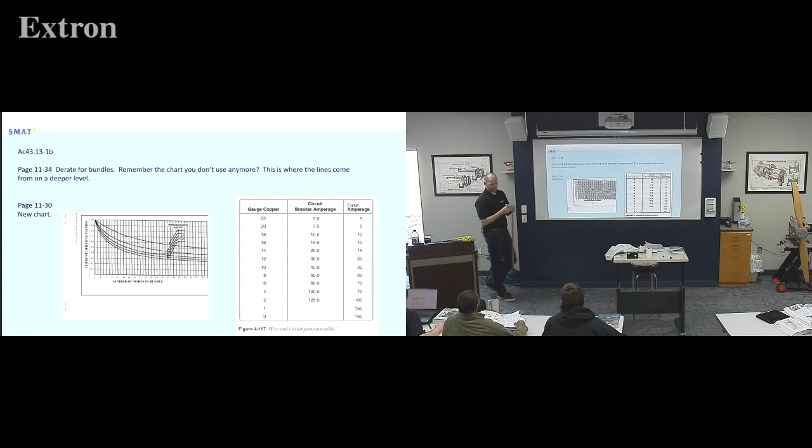That number's hard to read - 1, 3, 4, about 45%. So I'd take my amp reading and say I can only run 45% of the amp draw through it. If I go up to this line and only 20% of the wires in that bundle are using power all the time, then I'm okay with 75% of the amp draw in there.

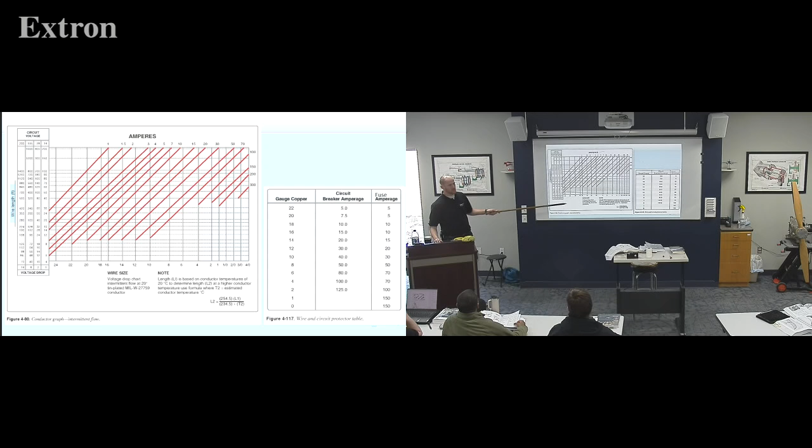So when you use this chart in real life, when's that gonna happen? Never. But just so you know, when you use this chart in real life, the new one doesn't have the curves, which means you use this chart, then you go to this other chart if it's in a bundle.

Chart, then circuit breaker - I put that over on the right just to be super clear. Derating, because in a bundle they're not going to give off heat as well as single and free air. If you read through AC43 really close, it'll say those charts are for a wire in free air. That changed from the old AC43 chart.

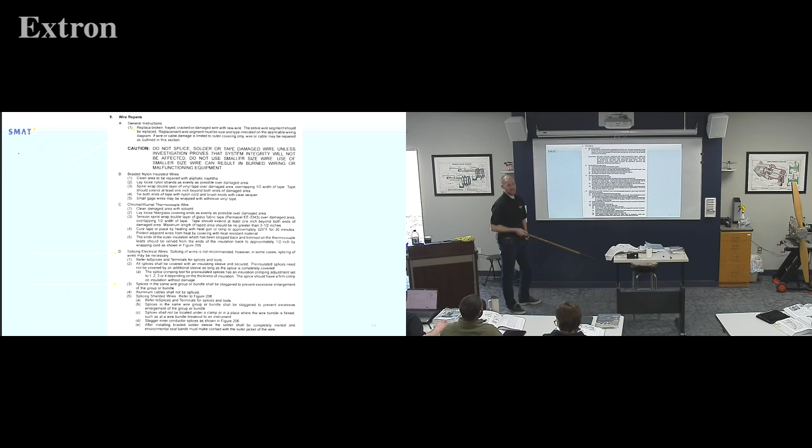Who gets to decide if it's necessary? That's the real question, because that's a slippery slope. Now every time I see a wire, it's necessary. It's necessary for me to get to lunch on time. I'll tell you what's necessary.

Where are we going? It goes on to say stagger them - so it's not just this one time with the one wire. They're basically repeating AC43.

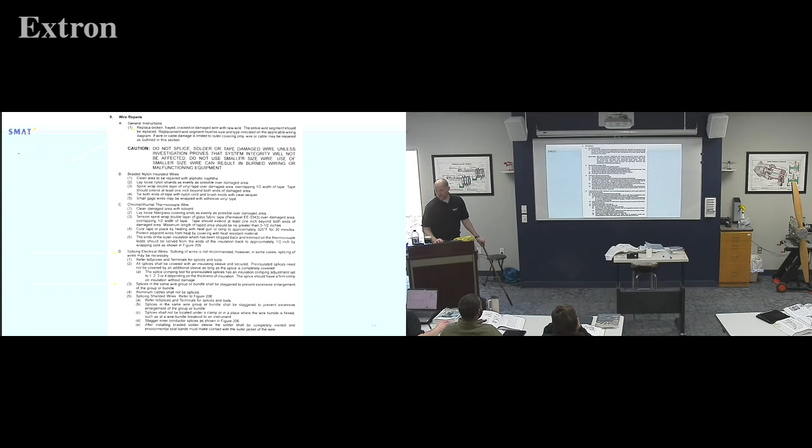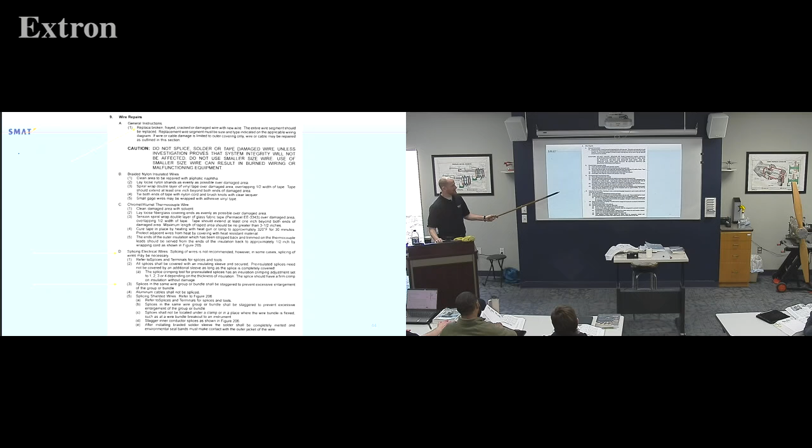Not very clear. Here's AC43: there should be not more than one splice in any one wire segment between any two connectors. So basically, I got a connector in the tail, a connector in the cockpit - that's one wire, and I should only have one splice in between. That's AC43. Some manuals - and I thought this one said somewhere, I just didn't find it - some manuals will give you up to 3.

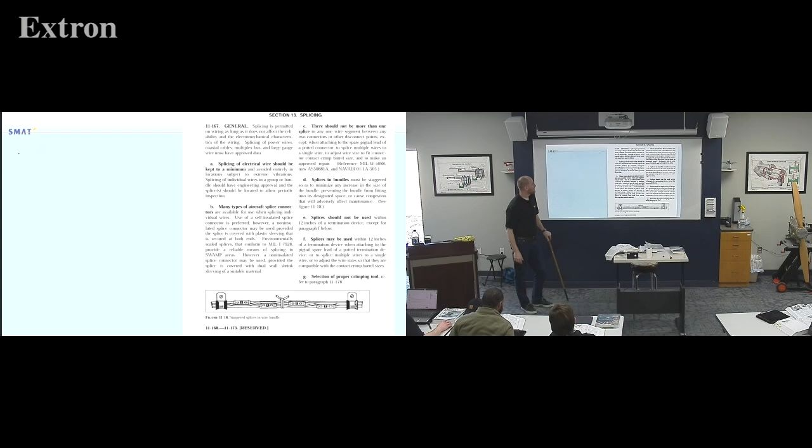But I'm reading AC43, copied it right out of there - highlight, clip, says 1. Huh. So I don't know where they get the 3 that you see sometimes, but 1 is the number I'm seeing in AC43-13. So if anybody asks how many splices in a wire, I would say according to AC43 11-167, part C, 1. That's what I would say.

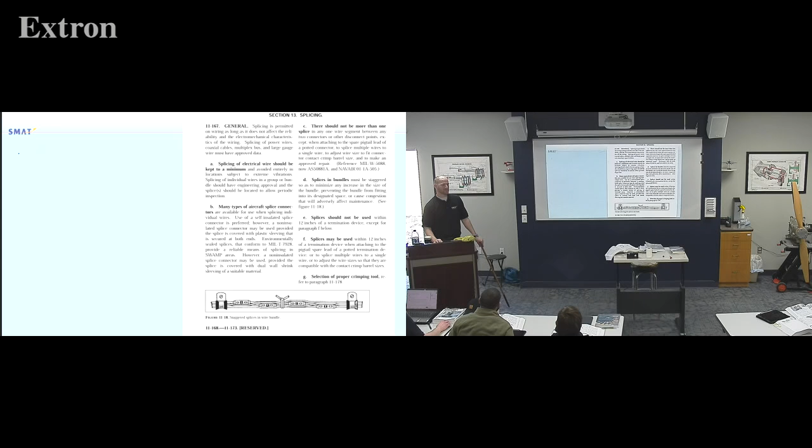Alright, that's it, that's all I got. Bill Nye - not a fan of his politics, but yeah, that guy used to be cool back in the day. He's a big baby nowadays. We're out. Questions?

Okay, big lip - if you're following along, lab from yesterday is done-ish. Today's is a paper lab, or Moodle lab, excuse me, paperwork. Tomorrow would start your actual wire replacement. If you haven't picked a wire yet and you get done with the Moodle section, it'd be a good time to look around and decide which wire you want to replace, and you can even get started on it.